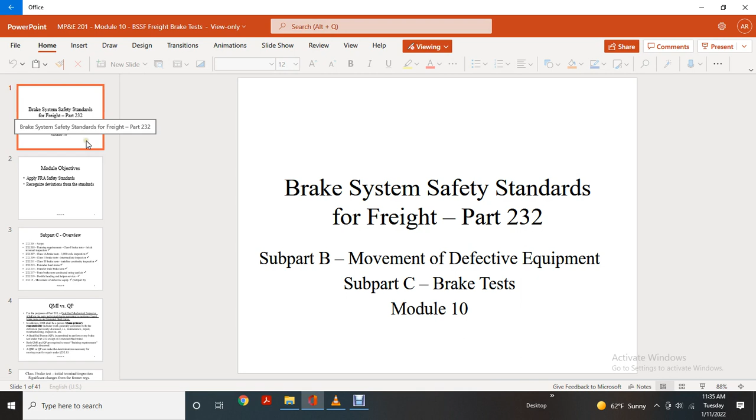Brake system safety standards for freight, Part 232. Subpart B covers movement of defective equipment, Subpart C covers brake tests. Module 10 objectives apply for the FRA safety standards, recognizing deviation from the standards. Subpart C includes 201 scope, 203 training requirements, Class 1 brake test initial terminal inspection, 207 Class 1A brake test at 1,000 miles, 209 Class 2 brake test intermediate inspection, 211 Class 3 brake test train line continuity inspection, 213 extended haul trains, 215 transfer train brake test, 217 train brake test conducted using yard air, 219 double heading and helpers, and 232.15 movement of defective equipment under Subpart B.

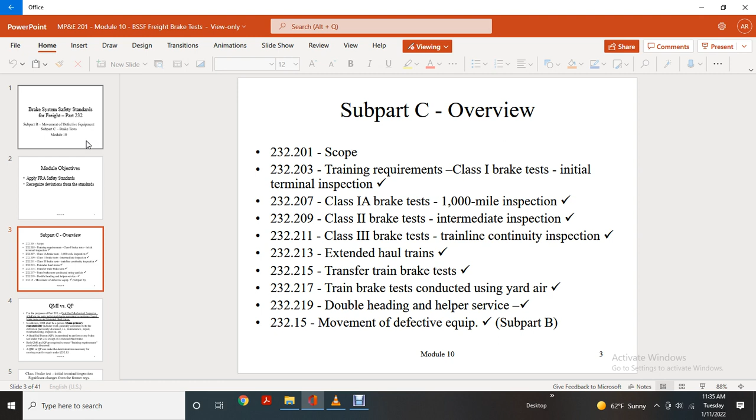Qualified mechanical inspector and qualified person. For the purpose of Part 232, the qualified mechanical inspector is the only individual permitted to perform a Class 1 brake test for extended haul trains. In addition, a qualified mechanical inspector shall be a person whose primary responsibility includes work generally consistent with the definition previously discussed: maintenance, repair, troubleshooting, inspection, etc. A qualified person is permitted to perform every brake test under Part 232 except for extended haul trains.

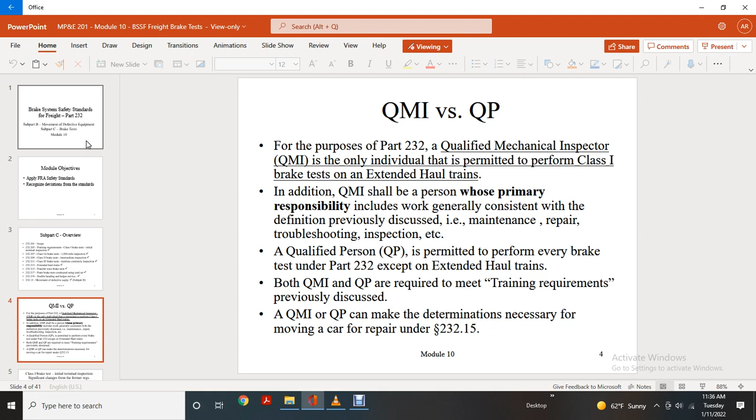Both qualified mechanical inspectors and qualified persons are required to meet training requirements previously discussed. The qualified mechanical inspector and qualified personnel make determinations necessary for moving a car for repair under 232.15.

Class 1 brake test, initial terminal inspection - significant changes from the former regulations required for performing the test of the train, in accordance with the previously discussed training requirements. Another Class 1 brake test applies on unit or cycle trains traveling 3,000 miles.

Charging the train with the pressure at which the train will be operated - the pressure for the rear shall be within 15 psi of the pressure at which the train will be operated, not less than 75 psi at the rear, with inspection viewing of the brake components on both sides of the train sometime during the brake test.

Brakes remain applied on all cars until release of the brake is initiated from the controlling locomotive. A written or electronic record of the Class 1 brake test is retained in the cab of the controlling locomotive until the train reaches its destination. The train operator must also note the result of the release portion of the inspection on the record. In this case, a roll-by inspection of the release portion of the test is employed.

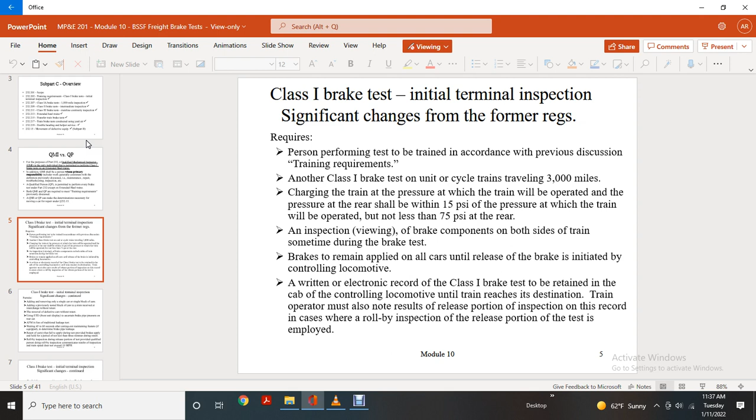Class 1 brake test, initial terminal inspection - significant changes continued: permitted adding or removing only a single car or a single block of cars, adding a previously tested block of cars, a train received at interchange without retest, removal of defective cars without retest, and the use of an end-of-train device or front unit display to ascertain brake pipe pressure on the rear car, or EOT device.

A traditional leak test involves waiting 45 to 60 seconds after cutting out the maintaining feature of the system to determine the brake pipe leakage. A car that failed to apply during the test must be retested, provided it applies and holds for a period of not less than 3 minutes during the retest.

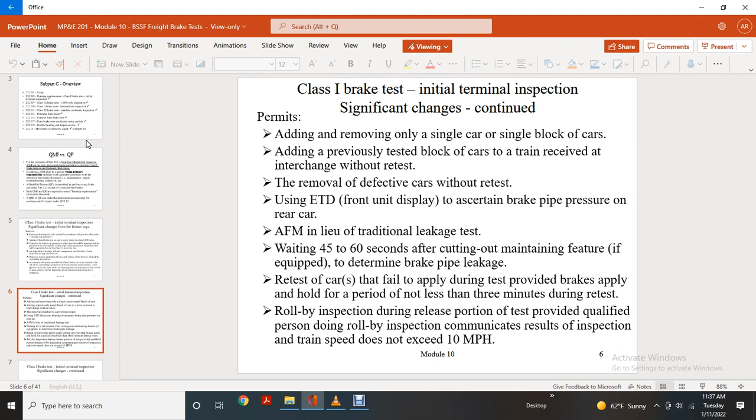Roll-by inspection of the release portion is provided when a qualified person doing the roll-by inspection communicates the result of the inspection, and train speed does not exceed 10 miles per hour.

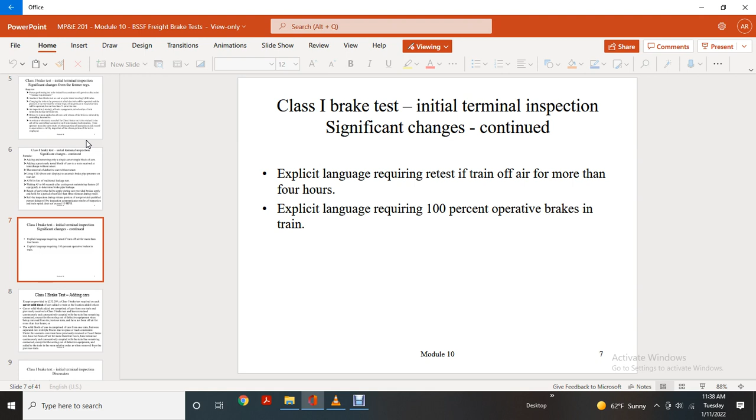Class 1 brake test, initial terminal inspection - significant changes continue with explicit language requiring retesting when the train has been off air for more than 4 hours, and explicit language requiring 100% of the brakes to be operative within the train.

Class 1 brake test rules for adding cars, except as provided in 232.209: the Class 1 brake test requires that each car or solid block of cars added to the train be tested at the location added, unless the car or solid block added is comprised of cars from one train previously received.

In Class 1 brake test scenarios, the cars must have remained continuously and consecutively coupled with the train line remaining connected, except for setting out defective equipment, since being removed from the previous train, and must not have been off air for more than 4 hours.

A block of cars comprised from one train may be separated into multiple blocks due to space or track constraints. Under these scenarios, the cars must have previously received the Class 1 brake test, not been off air for more than 4 hours, remained continuously and consecutively coupled with the train line connected except for setting out defective equipment, and be added to the train in the same relative order as when removed from that previous train.

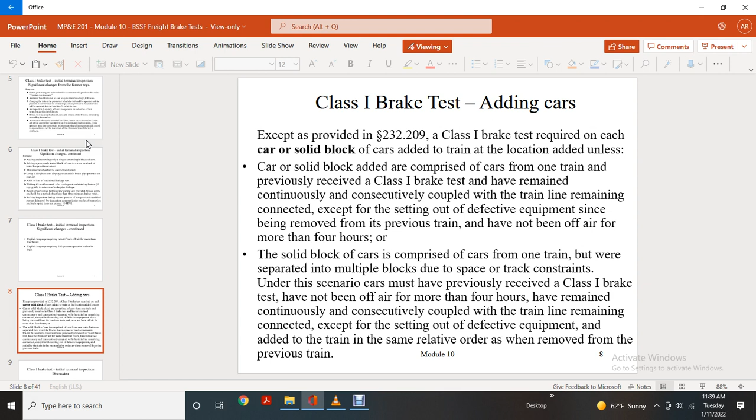Class 1 brake test, 1,000 mile inspection. A significant change from the former regulations requires the person performing the test to be trained in accordance with the previously discussed training requirements.

The 1,000 mile test inspection is based upon the most restrictive car or block of cars in the train. Charge the train to the pressure at which the train will be operated, ensuring the pressure reaches within 15 psi of the operating pressure, not less than 75 psi at the rear.

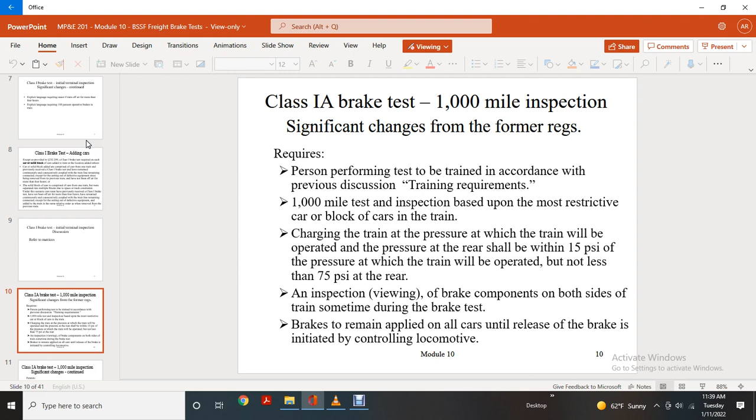An inspection viewing the brake components on both sides of the train at some point during the brake test. Brakes must remain applied on all cars until release is initiated from the controlling locomotive.

Class 1A brake test, 1,000-mile inspection. Significant changes continue: permit AFM in lieu of the traditional leak test.

Wait 45 to 60 seconds after cutting out while maintaining the determined brake pipe leakage. Retest the car that failed to apply during the test, provided brakes apply with a hold period of not less than 3 minutes during the retest.

This prohibits a railroad from arbitrarily changing the 1,000-mile inspection location without giving the FRA 30 days advance notice in writing, except in emergency situations such as derailments or other unusual circumstances affecting the railroad.

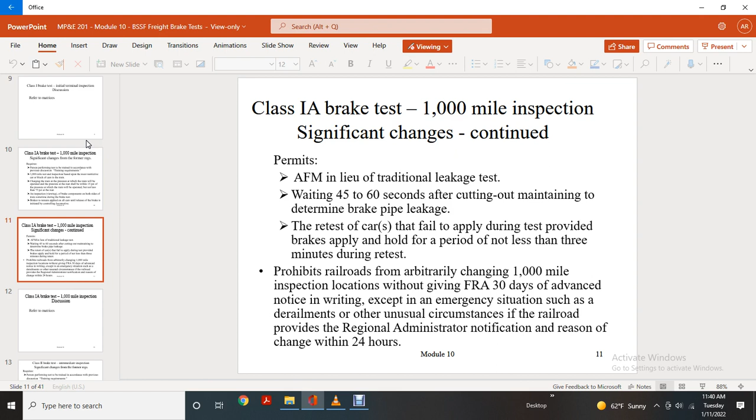Provide the regional administrator notification of the reason for the change within 24 hours. Class 1A brake test, 1,000-mile discussion.

Inspection—refer to matrices. Class 2 brake test, intermediate inspection. Significant changes from the former regulations: the person performing the test must be trained in accordance with the previous discussion.

Training requirements state brakes remain applied on all cars until release is initiated from the controlling locomotive. The operator of the train must know the air brakes function as intended, on the remotely controlled locomotive if an electronic or radio communication link between the controlling locomotive and the remotely controlled locomotive.

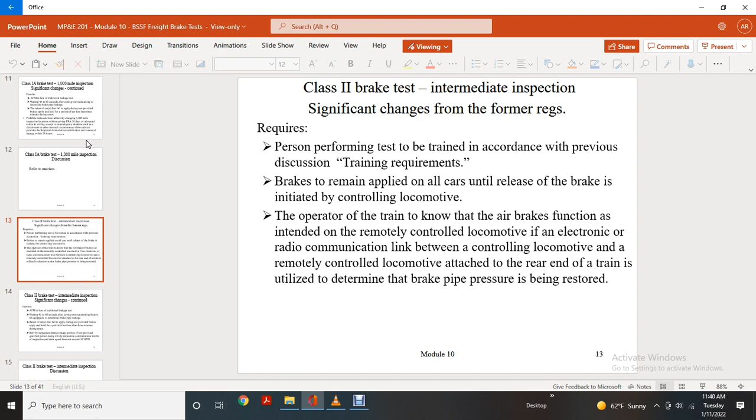Attached at the rear end of the train, it is utilized to determine that brake pipe pressure is being restored.

Class 2 brake test, intermediate inspection. Significant changes continue: permits the AFM in lieu of the traditional leak test. Wait 45 to 60 seconds after cutting out, maintaining feature if equipped, to determine brake pipe leakage.

Retest cars that failed to apply during the test, providing brakes to apply with a hold period not less than 3 minutes during the retest.

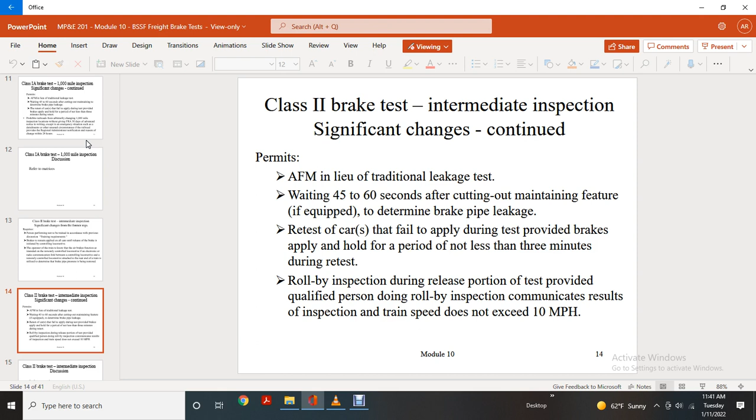Roll-by inspection: release portion of the test provided a qualified person performs the roll-by inspection and communicates the result. The inspection occurs when the train does not exceed 10 miles per hour.

Class 2 brake test and intermediate inspection discussion—refer to matrix.

Class 3 brake test, train line continuity inspection—new, with the test containing elements from the former intermediate brake test under 232.13(c)(1). The test requires the person performing it to be trained according to the previous discussion.

Training requirements set and release on the rear car when locomotives or for cars removed from the train, with the adding of cars or solid blocks of cars.

Applies when the train has previously received the Class 1 brake test and has not been off air for more than 4 hours. Confirmation of air restoration

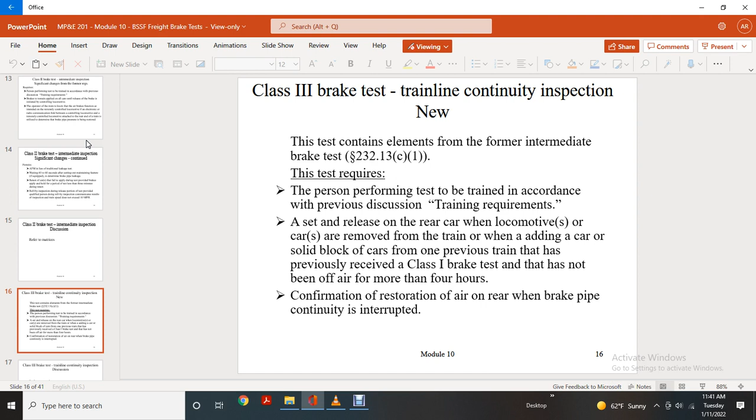when brake pipe continuity is interrupted. Class 3 brake test, train continuity inspection.

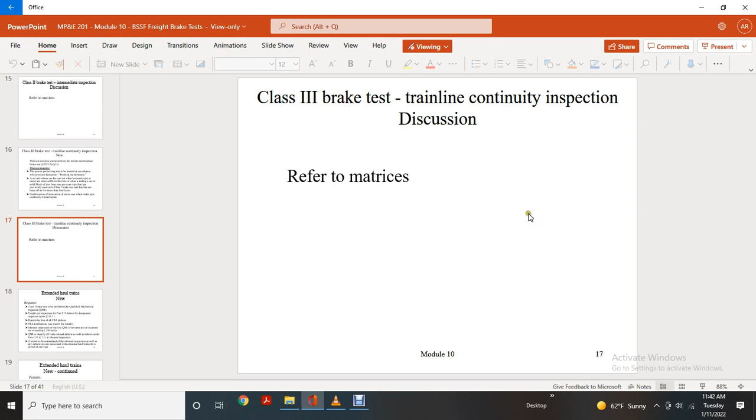Discussion: train line continuity inspection—refer to matrix.

Extended haul: new trains require Class 1 brake test before departure, performed by a qualified mechanical inspector. Freight car inspection under Part 215, defects identified by a designated inspector per 215.11.

Train must be free of all FRA defects. FRA notification, see matrix for details.

Inbound inspection of the train performed by a qualified mechanical inspector at a location not exceeding 1,500 miles.

Qualified mechanical inspector must identify all brake-related defects as well as defects under Parts 215 and 231 during the inbound inspection.

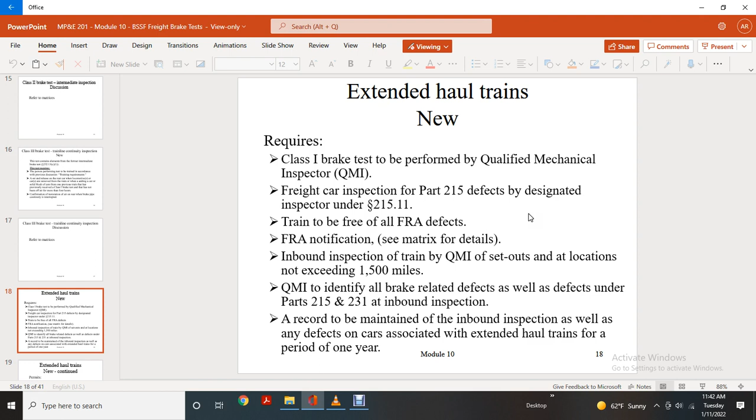Records must be maintained for inbound inspections as well as any defects associated with extended haul trains, for a period of 1 year. Extended haul trains, new condition: permits a designated train to move up to but not exceeding 1,500 miles between inspections.

Testing allows no more than one pickup and one set-out en route, including setting out defective equipment. This prohibits movement of cars for repairs at the initial terminal under 215.9.

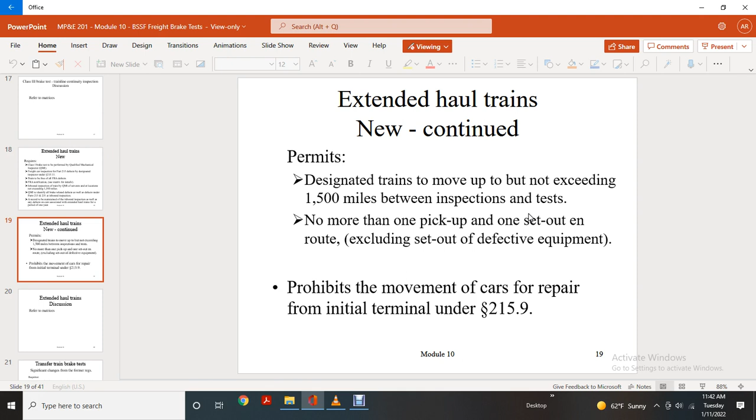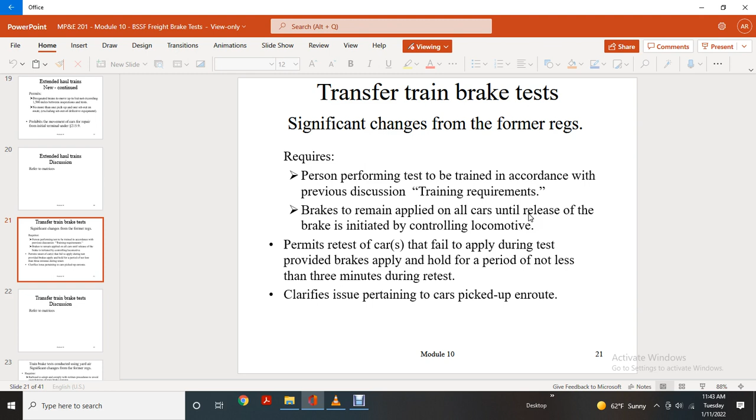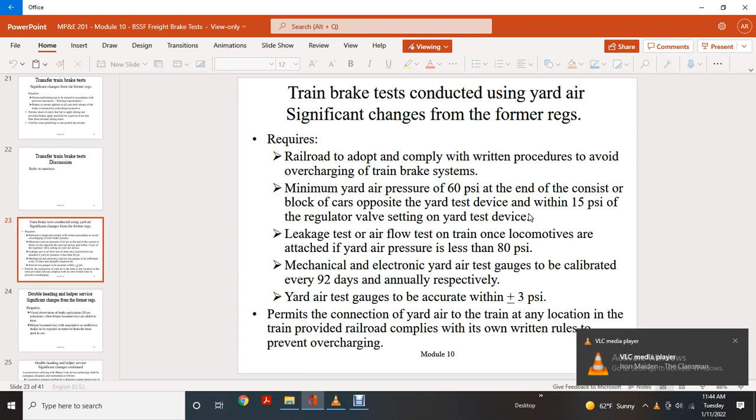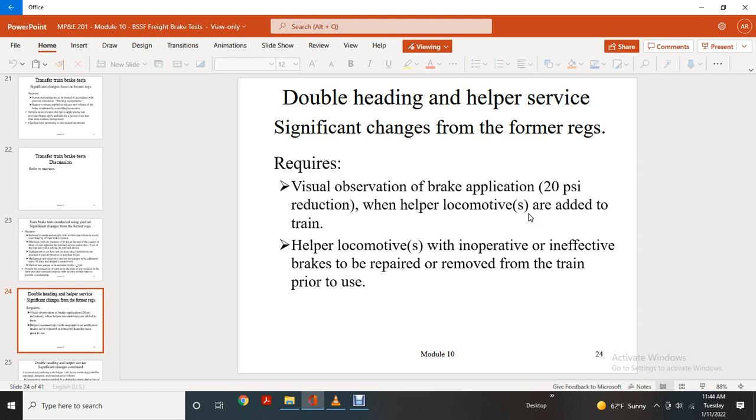Double heading and helper service has a significant change from the former regulations, requiring visual observation of a brake application with a 20 psi reduction when helper locomotives are added to the train. Helper locomotives with inoperative or ineffective brakes must be repaired or removed from the train prior to use.

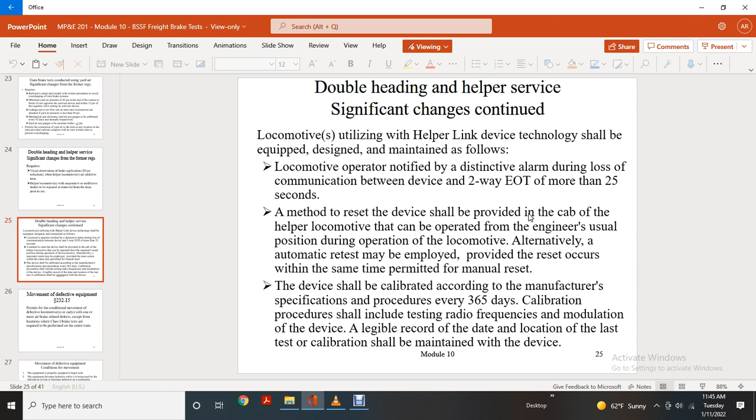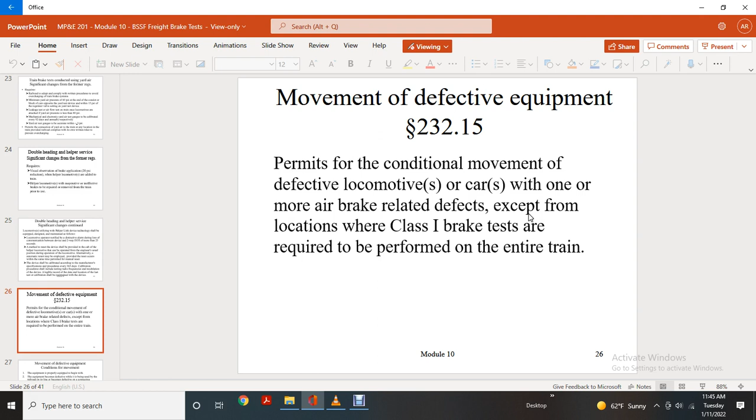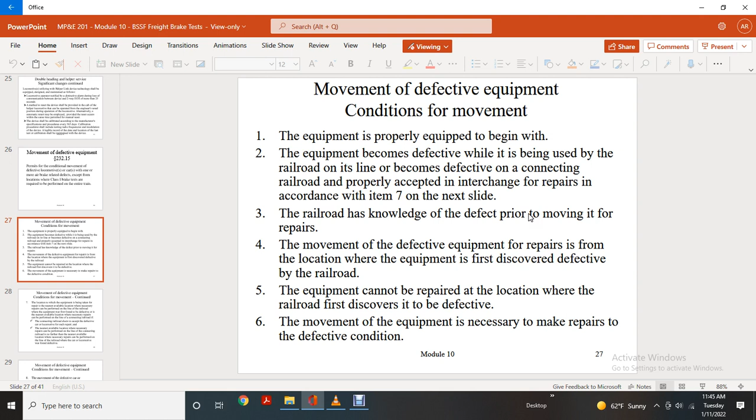Movement of the defective equipment for repairs is from the location where the equipment is first discovered to be defective by the railroad. The equipment cannot be repaired at the location where the railroad first discovered it to be defective, so movement of the equipment is necessary to repair the defective condition. The movement continues to the location where the equipment is being taken for repair, the nearest available location necessary for repairs to be performed, in line with the railroad where the equipment was first found to be defective.

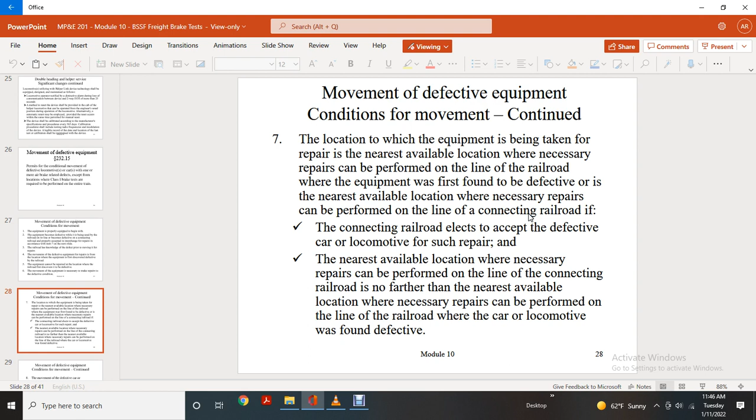It is the nearest available repair location where necessary repairs can be performed, on the line of a connecting railroad if that connecting railroad elects to accept the defective car or locomotive for such repair. The nearest available location for necessary repairs, performed on the connecting railroad's line, must be no farther than the nearest available location where necessary repairs could be performed on the line of the railroad where the car or locomotive was found defective.

Conditions for movement of defective equipment, continued: item 8, with movement of the defective car or locomotive for repairs, is not by a train required to have a Class 1 brake test.

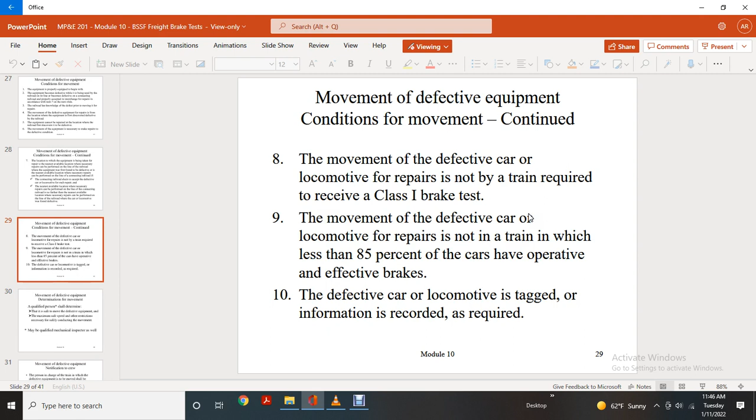The movement of a defective car or locomotive for repairs shall not be made in a train in which less than 85% of the cars have operative and effective brakes. The defect of the car or locomotive must be tagged and the information recorded as required.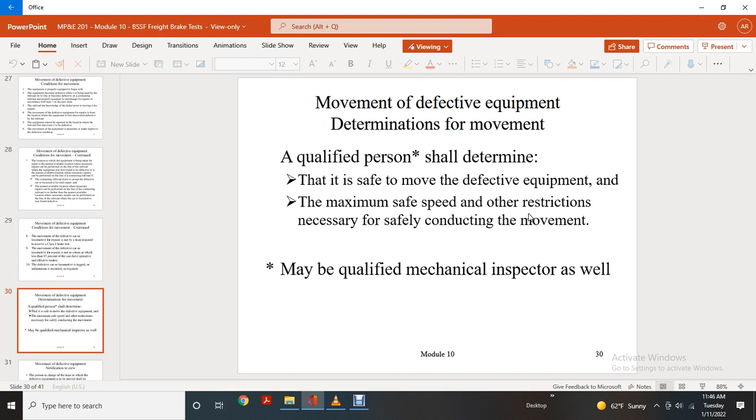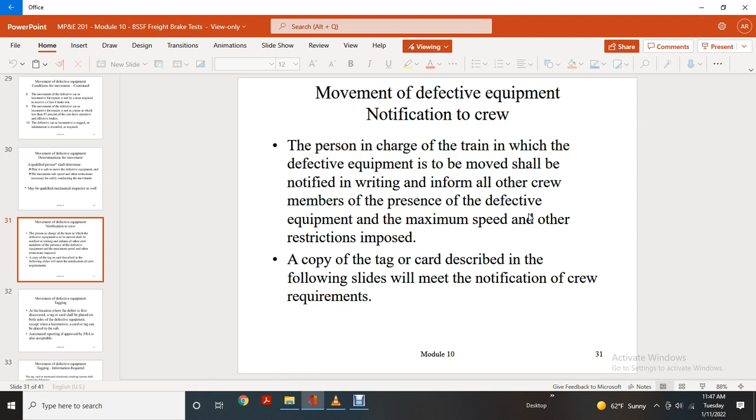A mechanical inspector may also be qualified for this. Movement of defective equipment requires notification of the crew. The person in charge of the train in which the defective equipment is moved shall be notified in writing and must inform all crew members of the presence of the defective equipment, the maximum speed, and the restrictions imposed, along with a copy of the tag or card, which meets the notification requirements.

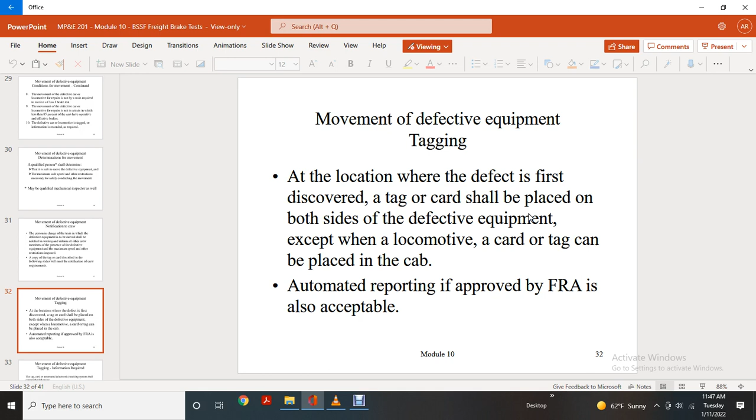Movement of defective equipment tagging: at the location where the defect is first discovered, the tag or card shall be placed on both sides of the defective equipment, except for locomotives, where the tag or card can be placed in the cab. Automated reporting, if approved by the FRA, is also acceptable.

Movement of defective equipment tagging information required: the tagging card or automated electronic tracking system shall contain the reporting mark of the car or locomotive number, the name of the inspecting railroad, the name and job title of the inspector, the inspection location, and the date.

The nature of the defect, the description of any movement restriction, the destination where the equipment will be repaired, and the signature or electronic identification of the person reporting the defective condition.

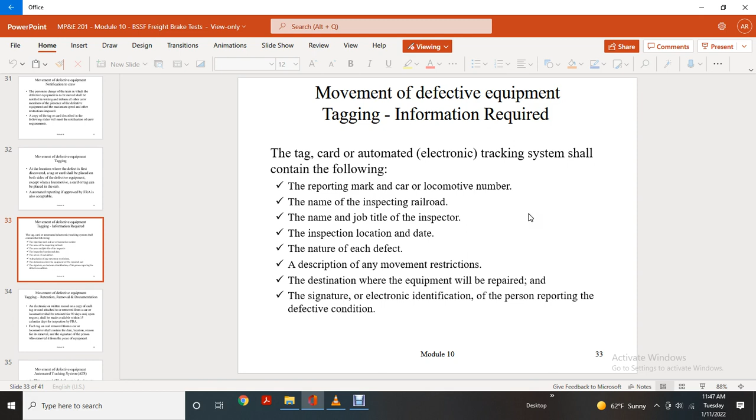Movement of defective equipment tagging: retention, removal, and documentation. An electronic or written record or copy of each tag or card attached to or removed from the car or locomotive shall be retained for 90 days, and upon request, shall be made available within 15 calendar days for inspection by the FRA.

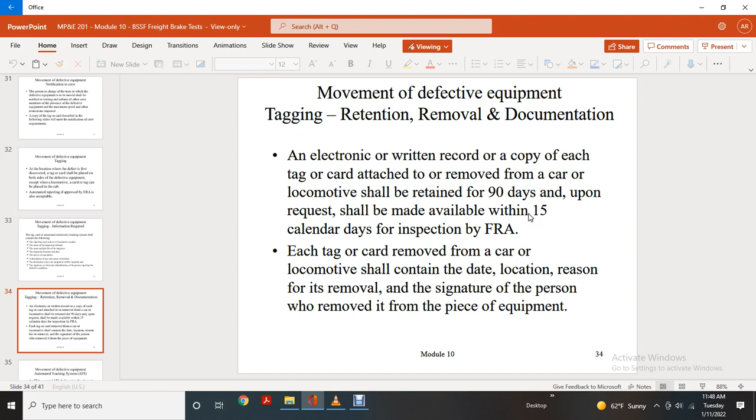Each tag or card removed from the car or locomotive shall contain the date, location, reason for removal, and the signature of the person who removed it from the piece of equipment.

Movement of defective equipment for the automated tracking system: the automated tracking system approved by the FRA shall contain the elements previously discussed and shall be capable of being reviewed and monitored by the FRA at any time to ensure the integrity of the system.

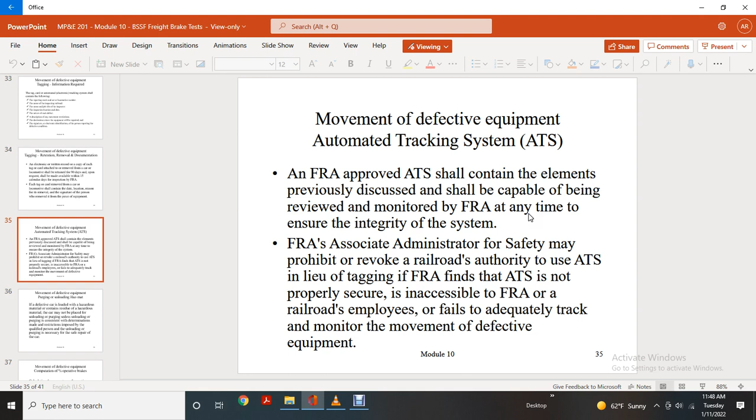The FRA's associate administrator for safety may prohibit or revoke a railroad's authority to use the automated tracking system if the FRA finds that the system is not properly secure, is inaccessible to the FRA or railroad employees, or that it fails to adequately track and monitor the movement of defective equipment.

Movement of defective equipment: purging, unloading, hazmat. A defective car loaded with hazmat material, or containing residual hazmat material, may not be placed for unloading or purging unless the unloading or purging is consistent with the determination and restrictions imposed by the qualified person, and the unloading or purging is necessary for the safe repair of the car.

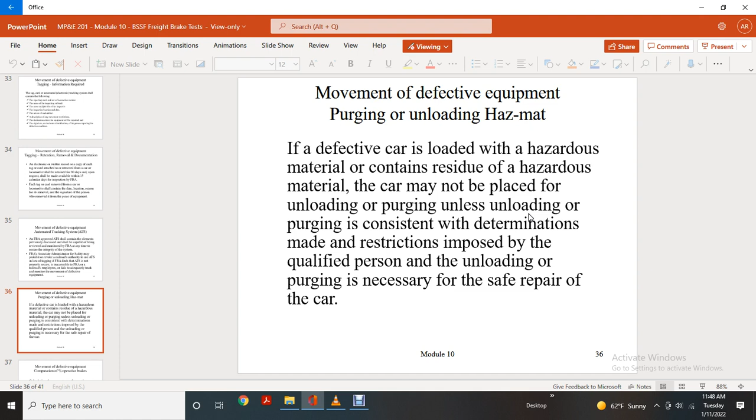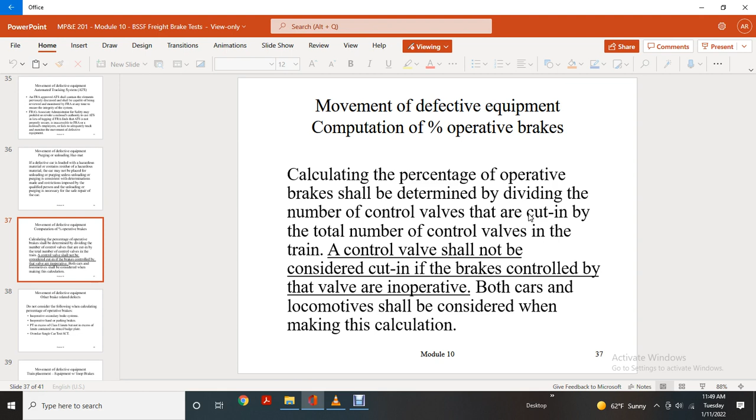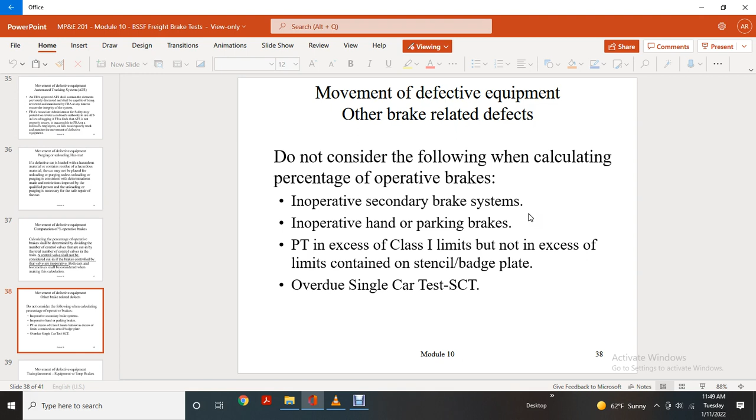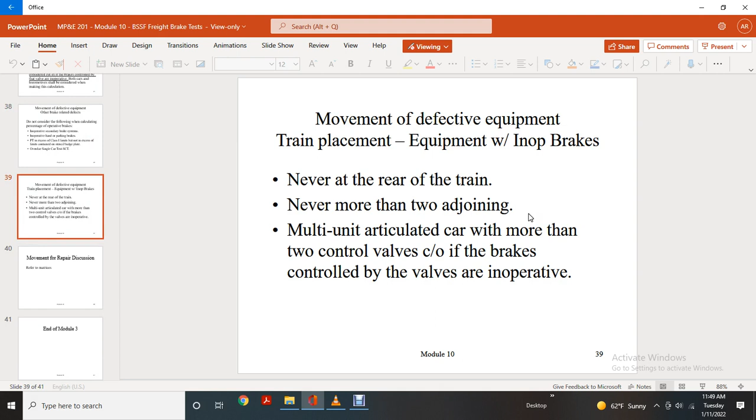For movement for repair discussion, refer to the matrix. This is the end of Module 10, or Module 3 for brake system freight. So that was Module 10.